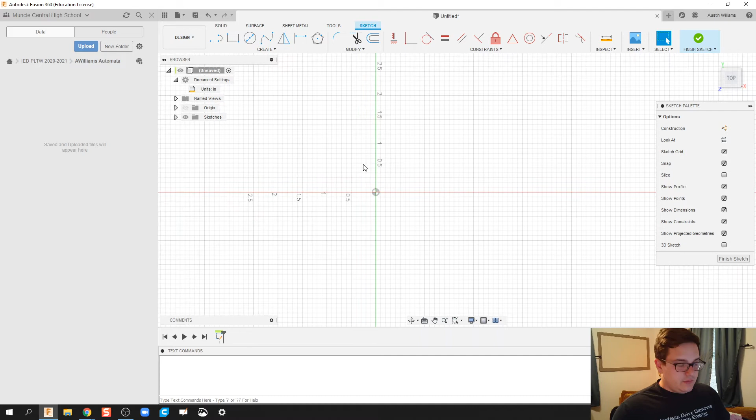So that box, if I remember correctly, is 4.5 by 4 inches. And then we're going to click Finish Sketch. Then I hit the E key for extrude, and we're going to make this 1/4 inch in thickness.

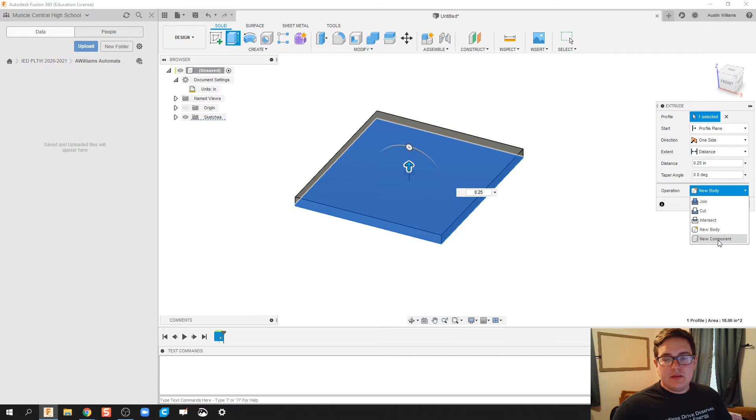We're also going to make this a new component. Click OK, and call it done. We're going to name this component - we'll call it bottom. That way when I start to throw my assemblies together and put a lot of different components together, we know what is called what. So even though this is one design file for just this bottom piece, make sure you're still calling this component bottom. Alright, so I'm going to go ahead and save it.

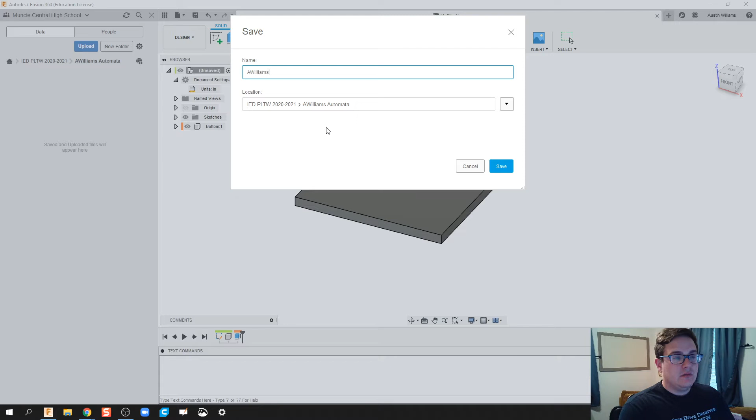And we're going to call this, let's say, A. Williams bottom. Alright, now if we're going to be a little bit correct, let's take this one step further.

This material is called MDF, so I'm going to hit the A key on my keyboard, and it's going to pop up the Appearance tab. We're just going to type in MDF, hold down, drag it over, let go. Now my particle board has the appearance of MDF.

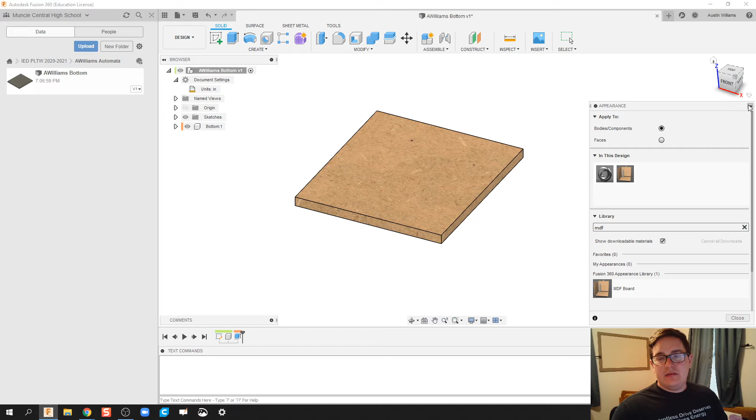Alright, we're going to go ahead and call that done. So what I can do is actually close out of this, and you see on this panel on the left side everything's automatically being uploaded. So as I'm saving pieces and they're being thrown in there, it's easy for me to reference them later. If I closed out on it, I can double click, and there we go, we've opened it.

But since I don't need it for right now, I'm going to get it out of my way. So let's go ahead and make another piece. Let's not waste our time making pieces if we don't need to. What I do know is that my bottom piece and my top piece are very similar - they have the same dimensions. So how do we make most effective use of our time?

I'm going to right click and copy. It's going to be in that Automata folder, so A. Williams Automata. I'm going to click on copy. And right here, we have the same copy of that top and bottom piece. We've just taken our work and duplicated it, so I didn't have to go back and make something else that's already made.

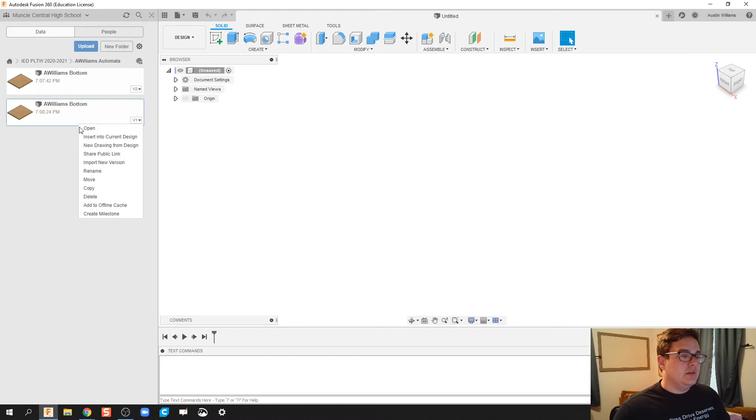You might be asking, why do they need to be different? Well, we're going to be drilling holes in our top piece here soon, so we need those pieces to differentiate. Right click, and we're going to rename this - we'll name it top. And there we go, we've got our top and bottom pieces, 2 different design files.

I'm on a roll, let's get going. Alright, for our side pieces - our side pieces are going to have, let's make sure we do this measurement correctly. I'm going to pull up that top piece, and I'm going to hit inspect, and we're going to inspect what the length of this is, and that's 4 inches.

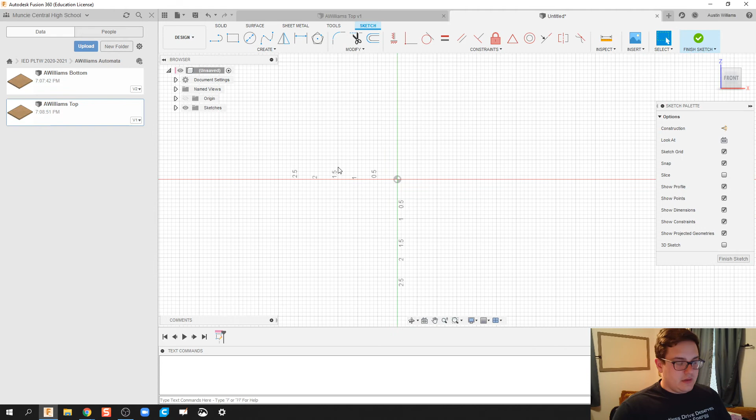And so what I'm going to do now is create a sketch, and it is going to be a rectangle that is 4 inches in width and 4 inches in height.

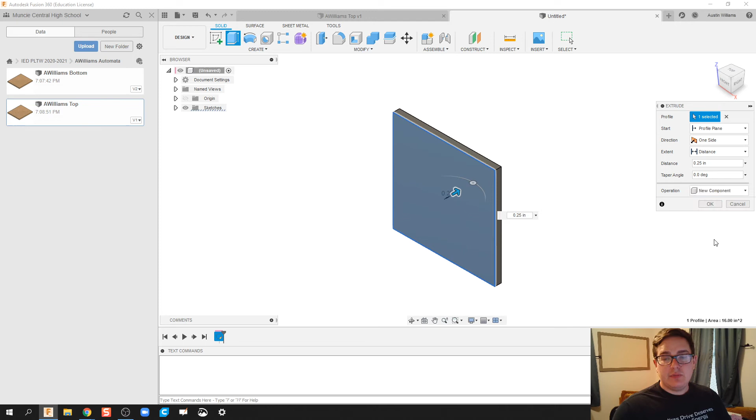Hit finish sketch, then the E key. We're going to extrude this out a quarter inch, make it as a new component, and click OK. Hit the A key, go to the Appearance tab over on the right.

Going with MDF, and there we have our side piece. So I'm going to save this and call it A Williams side, and save. Now, the same way we made copies of the top and bottom, we're going to do the exact same thing with the side.

If I'm going to be really specific, we're going to label this the left side. Oh, I didn't hit enter—let's fix that. Left side. Right click, make a copy, and rename it right side. Now if the left and right side of your automata are the same, you can pull in the same piece twice. But if we're doing truly bottom-up design, I want you to make a different design file for every piece.

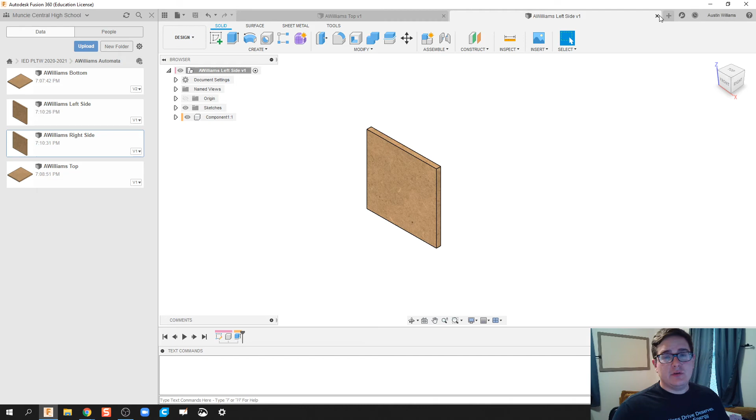So we've got our left and right, and our top and bottom. Now all we need is the back. What I'm going to do is close out on these and start with my automata. Let's save it and call this A Williams Automata.

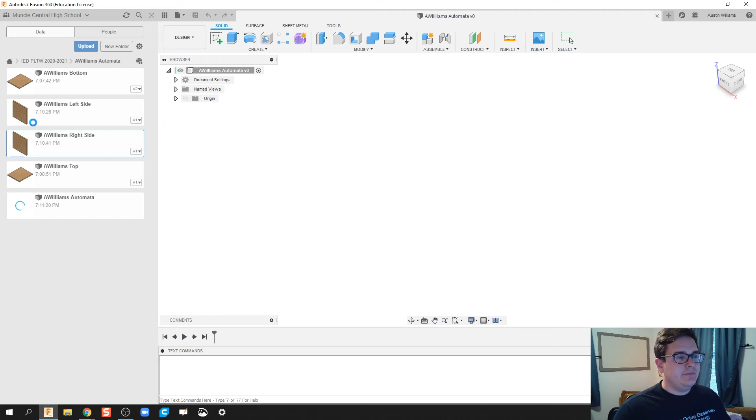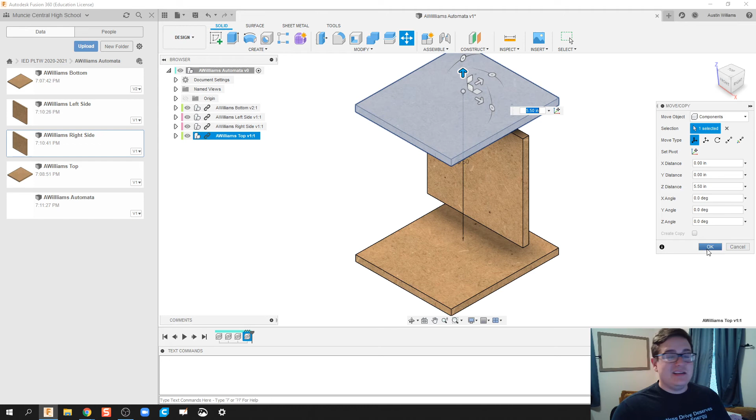Now let's go ahead and bring in some of these pieces: we've got the bottom, the left, the right, and the top. If you noticed, when I was building those pieces, the top and bottom were built in a particular work plane—that allows me to not have to twist them around and move them. That's just good design thought process when you're building pieces downstream, and it comes with experience and tinkering around with it.

So I've got my four pieces right here. Now the one thing I want to talk about is, you see right here, all of these have this linked symbol. So if I were to make a change to my box right here, it would go back and change what it looks like on the left side.

So what I'm going to do is make a hole right here on my left piece. It's going to update in my automata because we're doing truly bottom-up design. First thing I'm going to do is right-click, find my bottom piece, and let's ground it.

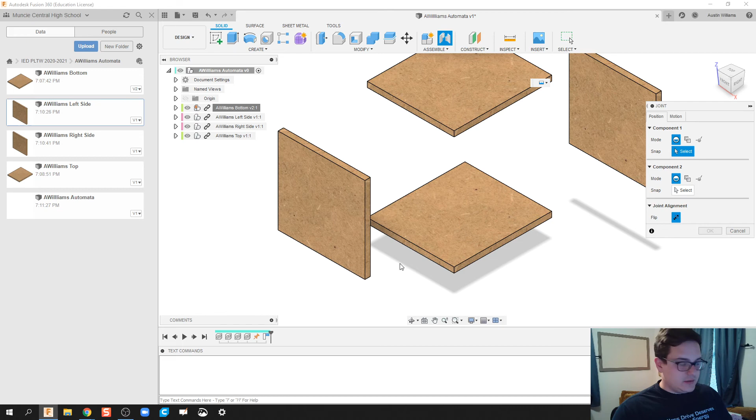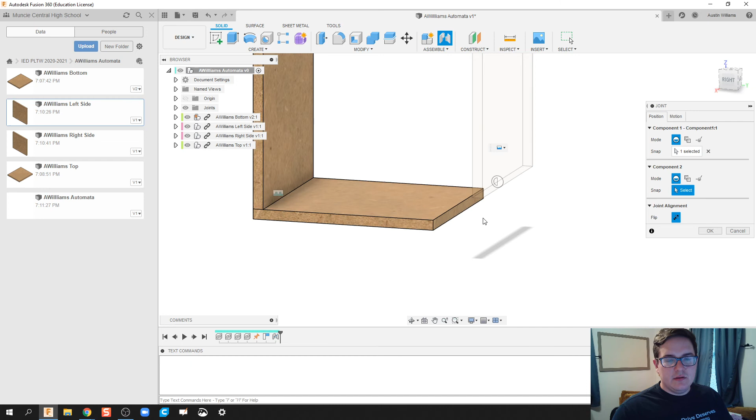Click on Joint, let's capture that position, and join the center of this to the center of that—that's going to be a rigid constraint. Everything is looking okay. Now let's do another join: the center of that line with the center of that line. Now let's go ahead and flip it. There we go.

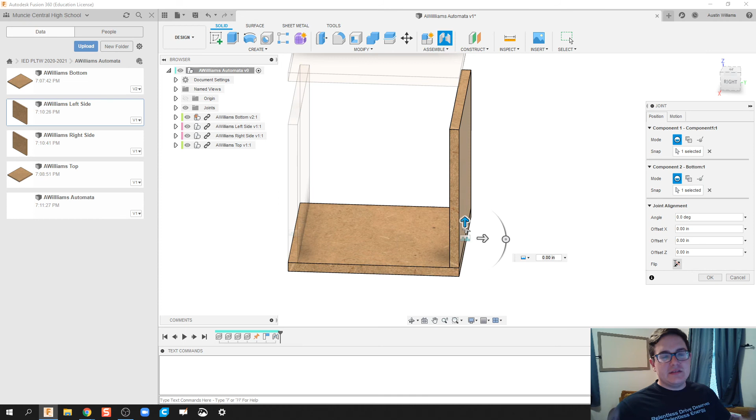If you notice, I ran into a little bit of a problem because the work planes I originally selected were wrong, and if we flip that component, it changes your work planes somewhat. So if your part is almost lined up, that's the opposite of what you're looking for—go ahead and flip your work planes, and there we go. We're looking good. Alright, last one, we're going to join that edge with the center of that edge, and click OK. We're looking alright, folks.

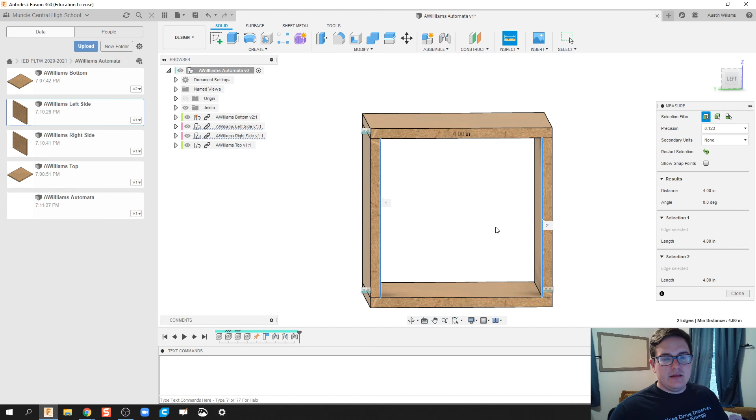The only thing left is to make my back piece, so I need to make sure it fits. I'm going to do inspect—we'll inspect the distance between this line and that, which is 4 inches, so we need a 4 inch. Let's do another inspect by a 4-inch square.

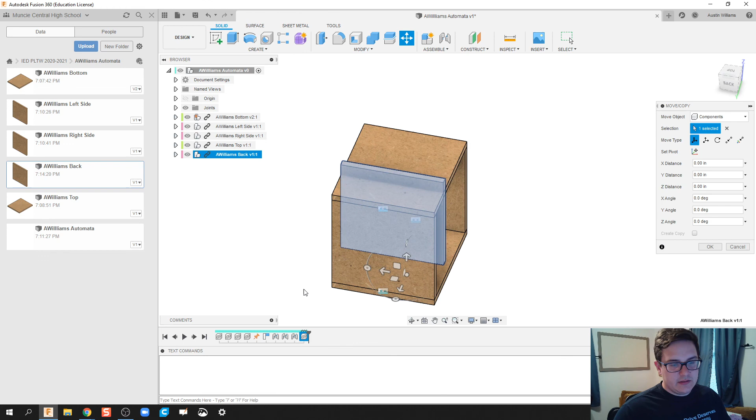So 4x4 is the dimensions of my left and right side pieces. I'll right click and make a copy, then rename it—we'll call this A Williams back. Bring this in, and there we go. Let's rotate this just a little bit, rotate it 90 degrees, and pull it on back.

Click OK. Now we're going to do joint—join the center of this line with the center of that line right there. Everything looks okay so far.

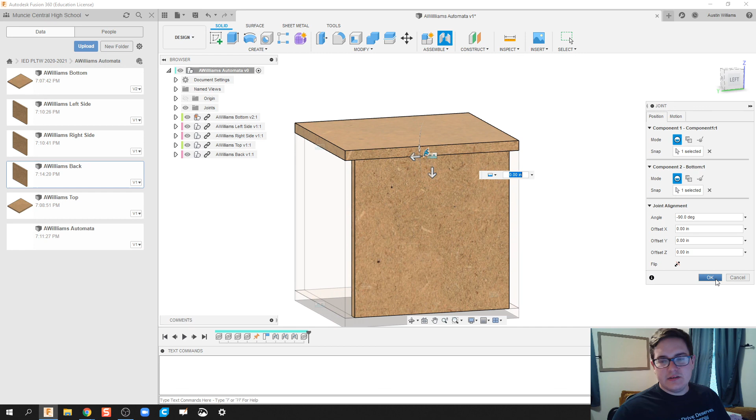So that's what we have right now: our Automata box is made. We have the design file where all those pieces are thrown into it, and we've got one design file for each individual part. If you have good recording sense and good documentation, this bottom-up design can be pretty easy because you've recorded everything well and have your specifications.

For the next video, we're going to start drilling holes into our individual designs and seeing how they affect the Automata design downstream. Alright guys, that'll be it for this video, and I'll catch you on the next one.